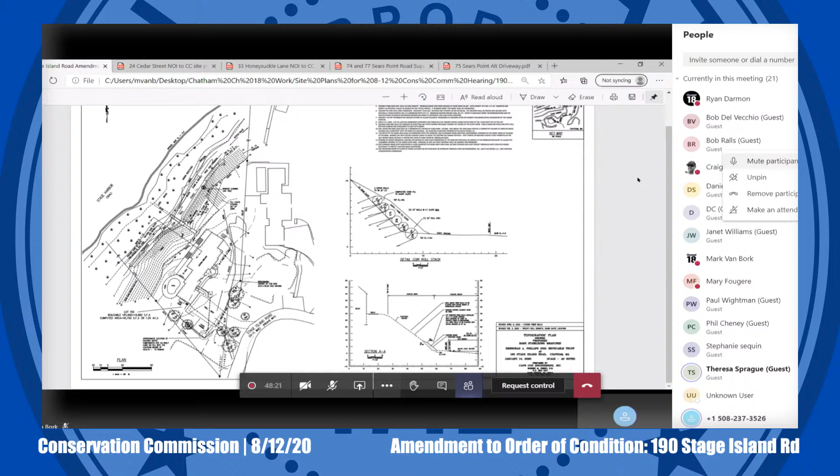I'll make it brief. We reviewed this with you back in the spring as the first step for the amendment process. I think the installation of the fiber roll that was the primary project went very well. Toward the end of that installation, there was an apparent observed need to extend those fiber rolls, and a 40-foot extension was proposed on the north end of the array that was installed. That ran into COVID-19 hearing trouble, and we ran into spring weather, which caused the project to cease. The amendment just sat there, and here we are today talking about it.

It's very basic, just a 40-foot extension of the project that was already installed. There's a few things about it that are different, where we're going to taper the cross-section, but the work would be carried out very much the same, except that it's far smaller in scale than the original project. The vegetation management would be identical to the management that's ongoing today. I don't believe there's much vegetation that would be installed there because the upper bank hasn't collapsed fully. That's all I could say, we're planning on getting something done as soon as the weather permits, and it would be a far smaller effort than what you've seen in the past.

So with that, I'd be happy to take your questions. Thank you, Bob. Oh, Janet, just Theresa Sprague is also on. Good morning, Teresa. Morning. I'm happy to answer any questions about the original installation of the fiber roll array, the plantings, et cetera.

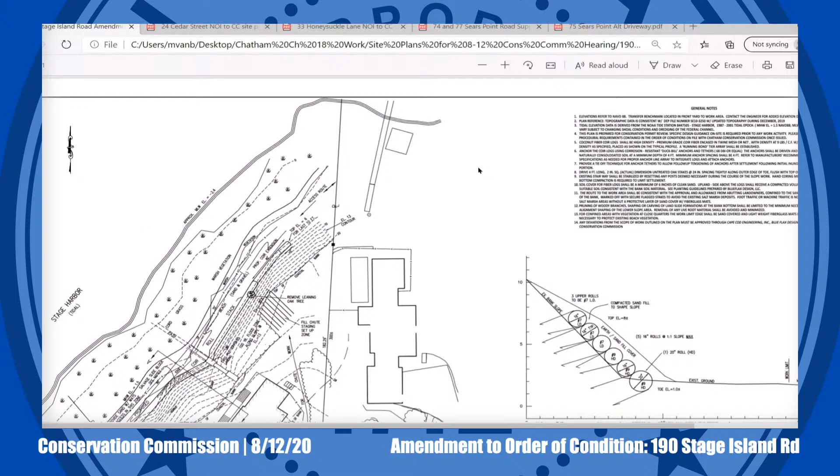I would just, looking at the notes for the revised planting plan, it doesn't mention any removal, it mentions pruning if needed. I just want to confirm that nothing is slated to be removed while extending the array. That's correct.

The extent of any, yeah, I know, hi Teresa. The extent of any removal is whatever slides or collapsed roots are in the way of the installation. But it's very minimal from my understanding.

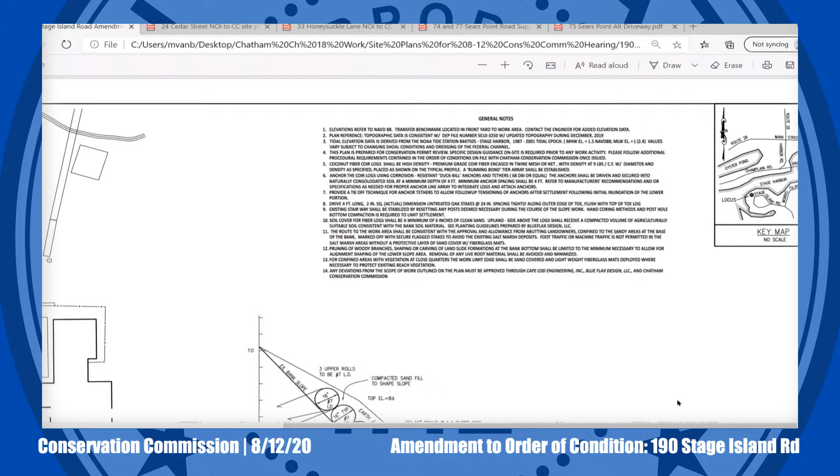Teresa? Yes, that's correct. And actually, you can see the area where we had proposed to move the array down into, or extend the array down into - I'm pulling up photos now, sorry you're not able to see them, from when we finished the project last spring. There's just a small extension of an area. There was no vegetation in that area. There had been some scour, and given the extent of the project, we just wanted to make sure we covered that additional scour area, so we're not causing more scour in the future.

So there was some scour there previously, not as severe as what we had seen, and as Bob pointed out, there was no slumping in that area. So we just want to be proactive. Okay, one more question, the amendment talks about next season. By next season, what do we mean by next season?

Well, when we originally made the request to amend, it was just as we were finishing up the project, and at the time everything was shut down due to the COVID-19 pandemic issue. So next season would be this fall, which I'm presuming is the same time period.

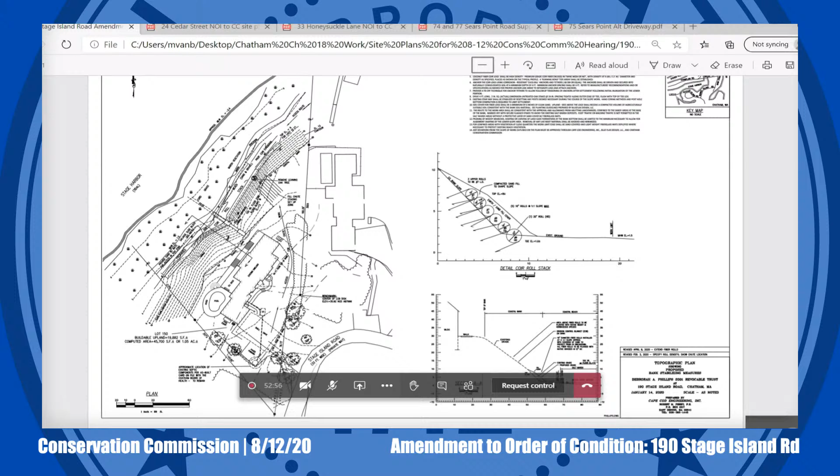So we had filed this, I believe, Bob, was this filed in April? Was this request to amend filed last April? Yes. Okay, so we meant the next work season, so after the summer season's over, late fall. Okay, that's fine.

Is that it, Bob? Yep, that's it. Okay, Tom, you had a question? Yeah, I was wondering if there are any problems with the stability of the pool or the patio.

Well, we're not near the pool. We've finished that area. That's just being managed with vegetation now. I was very impressed with the way this job was done, and they're pretty much finished with that end.

Well, my question was a little more specific, which was, is there any evidence of any lack of stability with the pool or the patio? I have not seen this site in several months, and I don't believe there is, because we concluded the concern for that pool was more hyperbolic than it truly was, but I haven't seen it lately.

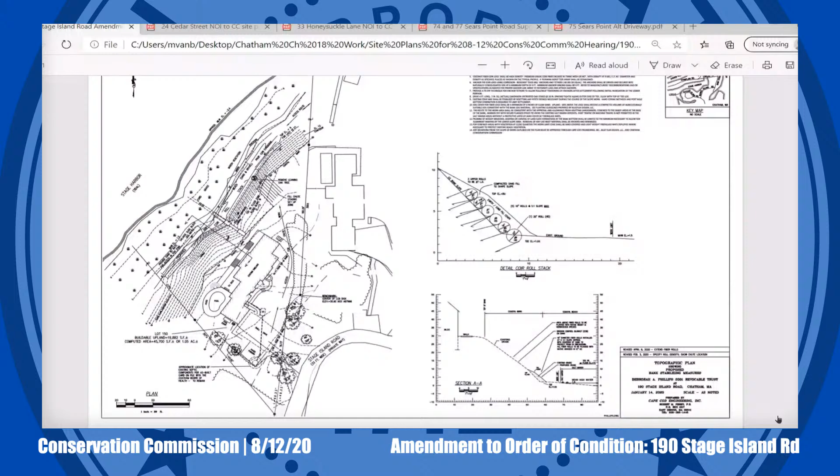Bob Ralls, motion to continue to the work session on September 2nd. Thank you. Is there a second? Clark seconds. Okay, roll call vote to continue this to September 2nd. Commissioner Ralls, aye. Del Vecchio, aye. Clark, aye. I vote aye as well. Unanimous. We'll see you all on September 2nd to review the order of conditions, the amended order.

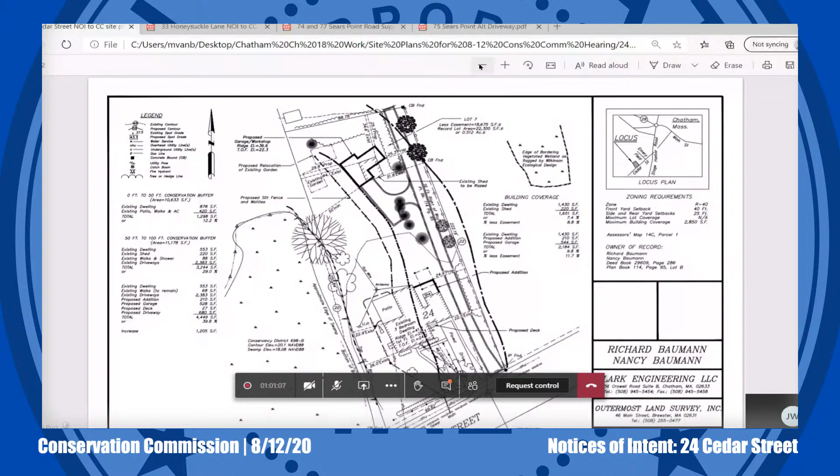Okay, Paul, what's next? Madam Chairwoman, next are the notice of intent, 24 Cedar Street, Richard and Nancy Baumann, SE 10. Mary, do we have a DEP file number on this yet? I did not see one, but I'll check again. Okay, I'll just continue with the announcement. The project is proposed construction of an addition to a single-family home, a detached garage and driveway at 24 Cedar Street, Assessors Map 14C, Parcel 1.

Okay, do we have representatives on the call today, please? Yeah, David Clark here. Good morning, David. Good morning. As Paul stated, we're looking to build an addition to an existing single-family home and a detached garage, all within the buffer zone to a bordering vegetated wetland.

The vegetated wetland is an old cranberry bog that has a discharge culvert that goes out to Oyster Pond on the neighboring property. This project started out as strictly an addition or expanded living space to the dwelling. We looked at several scenarios of how to get the homeowner some more living space. Unfortunately, most of the additions that were proposed were all within the no disturb zone. So we looked a little harder to try to avoid any disturbance in the no disturb zone.

So what we're doing is converting the garage into living space and putting a small addition on the north side. Because we're losing the garage space, we're requesting to build a detached garage at the north end of the property. The reason why it's so far away from the house is, again, we're trying to avoid the no disturb zone and also meet the zoning setbacks. Most of the construction is all within a lawn area. 4 pitch pines are proposed to be removed for the driveway to get into the detached garage.

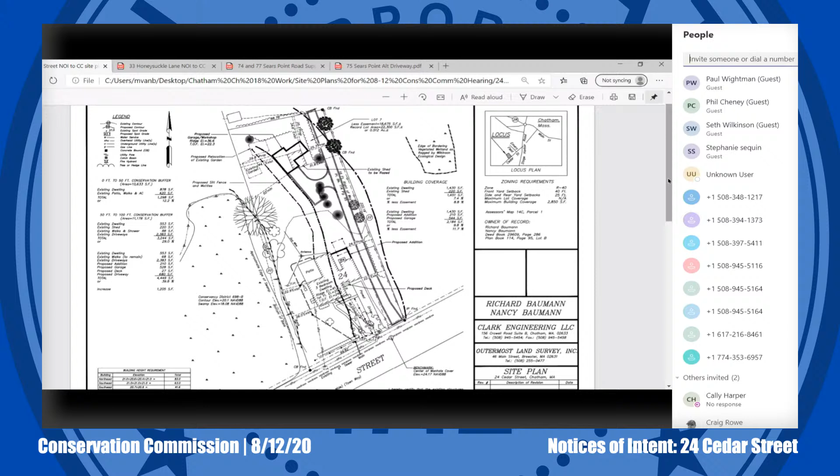Sorry about that. Yes, I've worked up a mitigation plan, which I believe you have. Yep, in front of you. I'm just losing it. I don't see it on the screen yet. We have the site plan. But we have received the mitigation plan. There we go. Thank you.

Ah, perfect. Yes, I've worked as much to get a healthy planting area. I've got a total of, checking my numbers here, 1,486 square feet of planting along the edge of the resource area as best we can. We're fairly tight to the house towards the street, but we're still managing to get a strip there where it's a fairly high erodible bank. So we're able to get 617 square feet of planting along that area to fill a gap. In between the two green mitigation areas you see is a really mature spruce tree, which is doing fine and pretty much prevents any new planting underneath it.

So we have to the north a broader area of planting, which would also displace an existing vegetable garden, which would be underneath that green area now and is being relocated a little bit to the north and east, as far as we can get it outside of the disturbed zone, but still have light to be a functional vegetable garden. I've got replacement trees: one white pine and three red swamp maples scheduled to go on the property to replace the pitch pines that are being removed for the sake of the driveway. And I think that covers it in general.

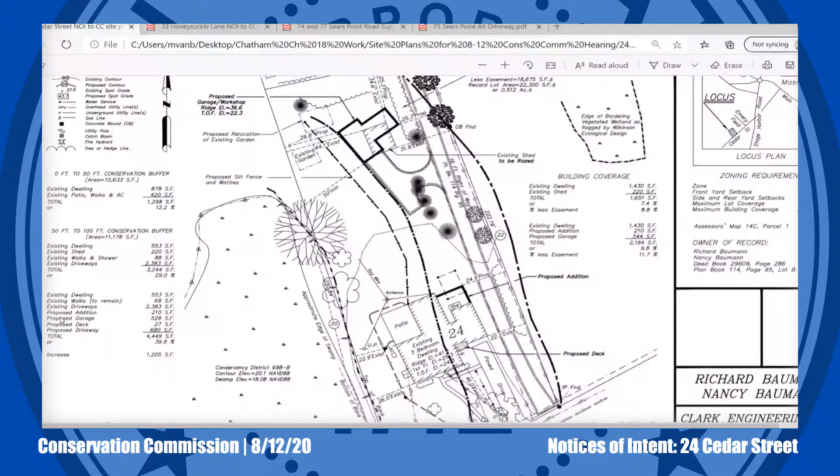Okay, I have to admit that with my poor eyesight, I'm not really focusing on the garage. Is that the one that looks like a square on top of a rectangle at the upper end? Yep. So the heavy line is the footprint of the new garage workshop, and the lighter hatched line underneath is the shed that's going to be removed.

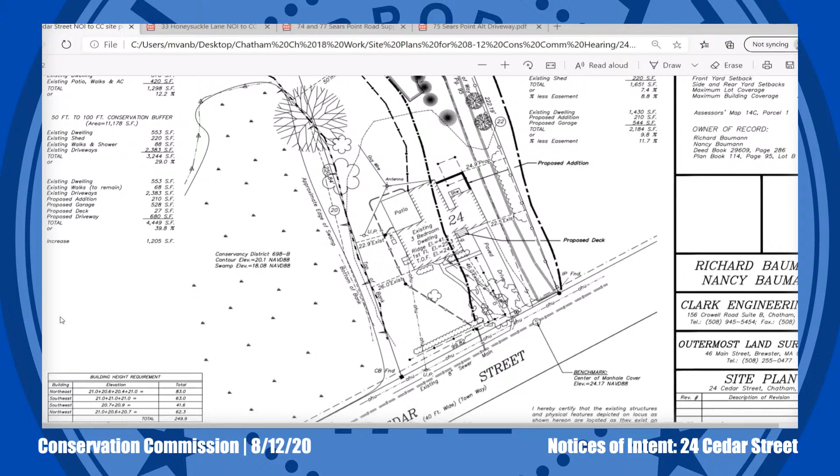Okay, thank you. I had some concerns about a couple of things. You touched upon it, which is—I think you recognize that the table submitted on page 7 of 8 of the materials, the note there that you're going to add 878 square feet of structure within the no disturb zone, that was an oops?

I don't see what you're referring to. Hold on a second, I'm looking. It's the letter from you to the Conservation Commission dated April 28th, 2020. On page 7 there's a table of the number of square feet being added and subtracted. At the very top of it, you'll notice within the 50-foot no disturb zone, for the section labeled area of structures under proposed square feet, is the number 878.

Oh, that is a mistake. Let's see. That 878 should be over to the left, under existing. Actually, it should be added to the left under existing. So what's being proposed is still 878. So the net change is 0. The bottom line is that the net change is 0.

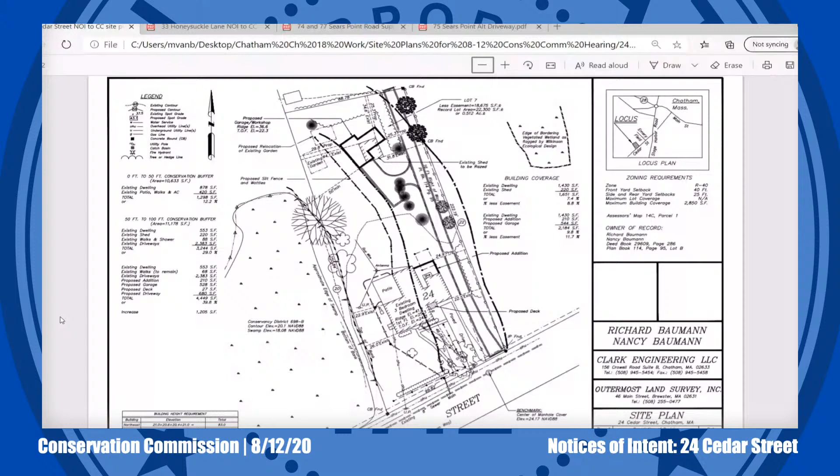The mitigation area to the north on the other side of the spruce, there's a lot of bittersweet wanting to grow out of the ground. Wondering what you're going to do about that before you plant. I apologize, I haven't looked at that spot in about 6 months. It was winter. I don't think there's too much in that exact area where that's going, perhaps a little bit on the very northerly end. But certainly doing a cut and wipe on any bittersweet we find in that area, and any other invasives, would be a prerequisite for getting these plantings in.

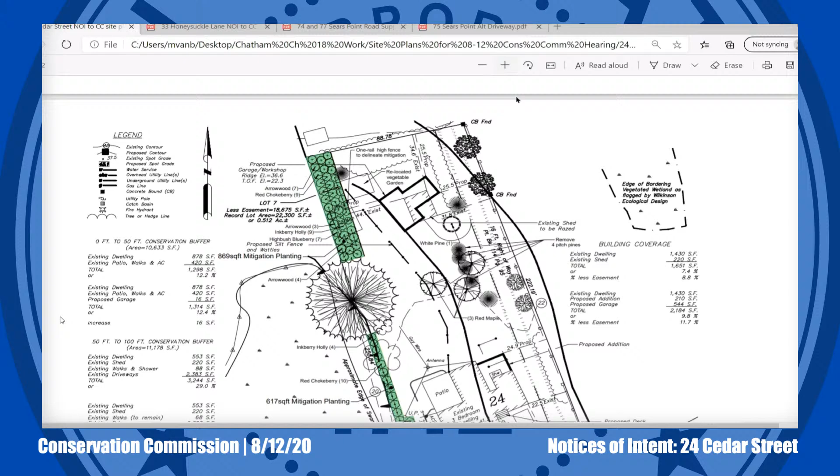Okay, and so we can add that to the OOC going forward. Yes. Another thing was the mitigation area to the south of the spruce. There are some existing arborvitaes and other plants, the mimosa tree and so forth. Those are going to remain? I believe all of that is going to remain. There's one just south of the spruce, I think a Rose of Sharon, an exotic ornamental, which may need to go. But it's, if I remember, a tired ornamental without much value.

Okay, and then you have a red maple being substituted for the ornamental plant on the south of the front yard. Yeah, I apologize, apparently the plan on the screen is a slightly different version than you might have received in paper form, because I think that was the final revision. Yes, it's an exotic shrub in the front there, and the owners thought putting one of the trees there as a replacement would be a good idea.

Do you think it may be too close to the house if you plant a red maple there? Oh, not at all. No, plenty of room for that, we've got good space there. Okay. I think that's all I had. Okay, thank you, very good. All right, thank you, Bob. Any other questions or comments from anybody on the call?

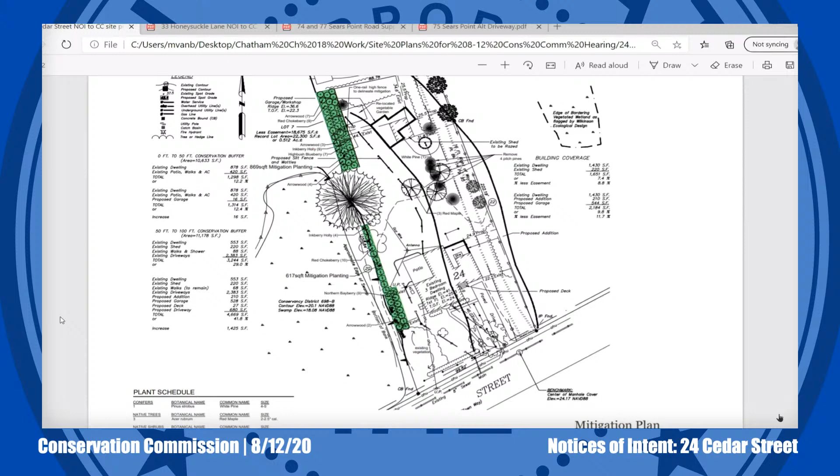Okay then, David, are you and Phil available next Wednesday if we continue this to get these pieces put together and complete it? Yes, I am. I can get you the revisions on the plan and the variance by the end of the week. It won't be your typical one week request to have it before the meeting, but if the commission is fine with that, I can. We're fine with that, since we're the ones who scheduled the hearing within a week of the scheduling.

So yep, that's fine. So just to review, you're going to correct and conform all the figures on the site plan and the mitigation plan, identify the 50 and 100 foot boundary lines, add a work limit line as close to the NDZ line as possible, add a request for a variance, and ensure the mitigation plan the commission has is the most recent and correct version. That's what I've got.

Yes, Phil Cheney here. Once I have the revised site plan from David, I can revise my plan, resubmit the PDF, and I assume you'd want a couple of hard copies as well? Yes, please. Mary, how many hard copies are we collecting these days? We just need 2 for the file, because everybody else will receive it electronically. Is that okay with all commissioners to receive a digital copy only, or does anybody want a hard copy?

I'd like a hard copy, please. Okay, then make 4 in case somebody else wants one. Very good, I'll provide 4 hard copies. Thank you. And Janet, just that the Rose of Sharon has to be identified to be removed too on the mitigation plan. Okay. Did you get that, Phil? I'll take a look and confirm that. Okay, thank you.

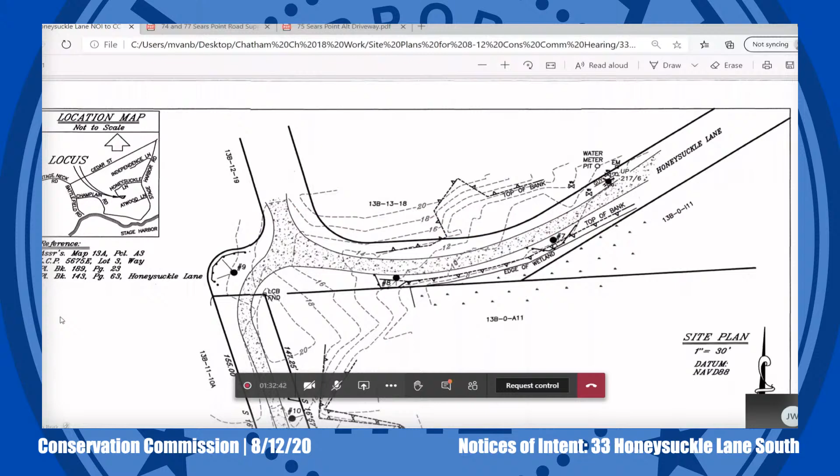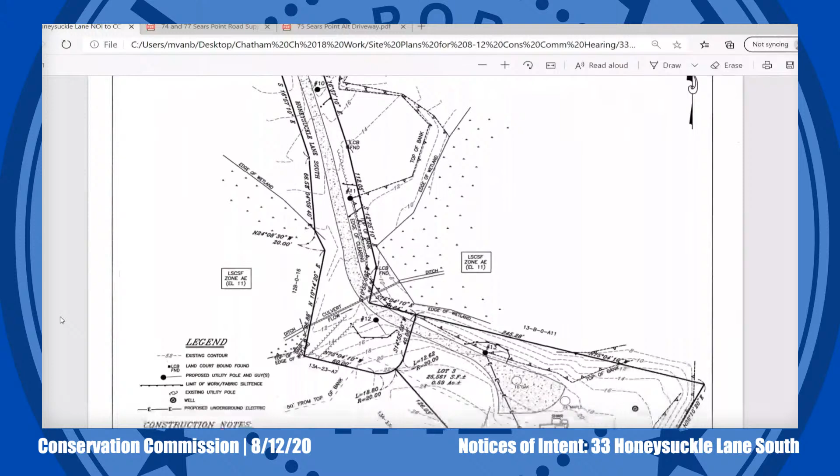Good morning, Stephanie Sequin with Ryder and Wilcox, representing Dan and Roz Smythe; Mr. Smythe is here attending as well. The project is the installation of 7 utility poles and overhead electric service to provide electric service to the existing house at 33 Honeysuckle Lane South, at the very end of the lane. The house was built in the 50s.

Currently, the electric service comes from Champlain Road, overhead across private property to a pole also on private property, then I believe underground to the back of the house. I said in my narrative it recently came to the attention of the Smythes, but it was actually more like 5 or 10 years ago that this has been going on. The current service was installed without a legal easement for any of the poles or wires that exist.

The Smythes have been in lengthy discussion with the private property owners and have repeatedly been informed there is no legal easement. The current owners are not willing to grant one, so they've had to investigate an alternate source of providing electric service. They've also been in extensive discussions with Eversource, who exhausted all other options and determined the only viable option is to extend the existing overhead wires that come partway from Champlain Road or Stage Harbor Road along Honeysuckle Lane, the rest of the way down Honeysuckle Lane and Honeysuckle Lane South to the north side of the existing building.

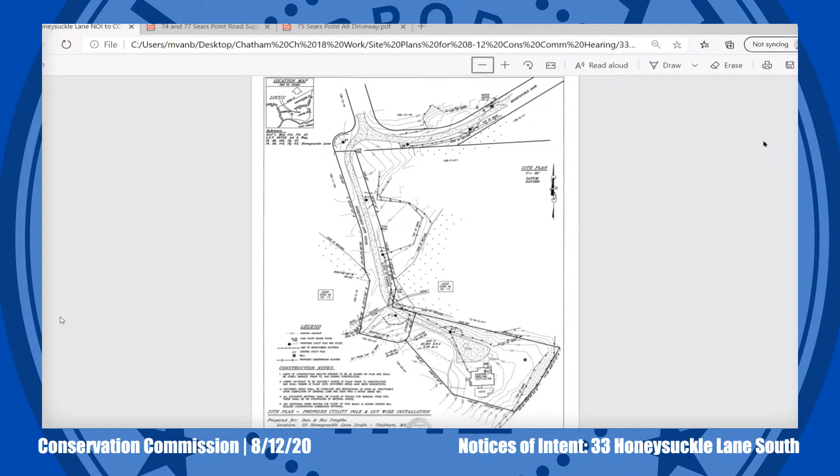I would recommend that we continue this to the work session on September 2nd for review of an order of conditions. Do we have a motion? Bob Ralls moves to continue to the September 2nd work session for order of conditions. Do we have a second? Clark seconds. Thank you. Roll call vote to continue to the work session on September the 2nd.

Commissioner Ralls, aye. Del Vecchio, aye. Clark, aye. I vote aye. So this is continued to the work session on September the 2nd. Thank you very much. Thank you all. Thank you.

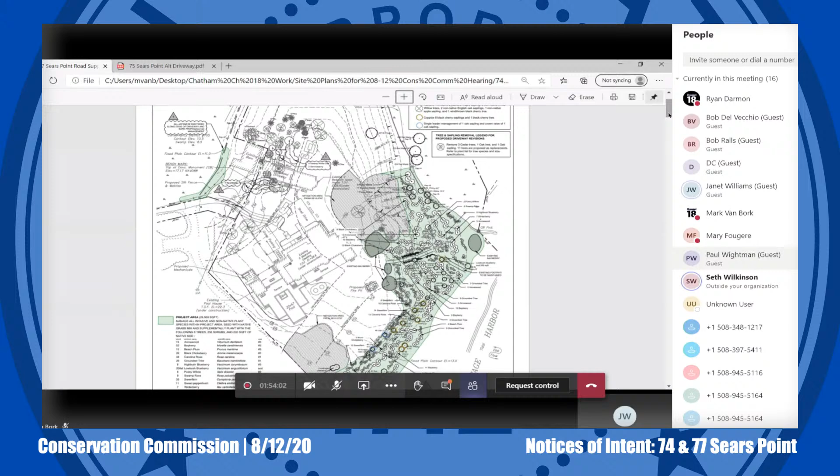I think I can mostly summarize, and I'll go into a bit more detail with regard to activities around the proposed driveway and the guest house, since that was a little less developed in the field, but there really haven't been any considerable changes since we reviewed the data for the extensive restoration here. It continues to be just shy of 30,000 square feet of additional vegetation that would link to the already previously proposed mitigation area, which is well underway. That was approved under a separate order.

To run quickly through what's proposed on the embankment, in addition to the complete removal of invasive species and restoration planting, which is over 250 shrubs, 200 square feet of low bush blueberry, 910 grasses planted as plugs, 382 forbs planted as plugs, as well as seed mix and 6 trees, which would be pussy willow to replace the exotic willows down in that wetland area.

The quick list of what we're proposing to manage in terms of trees: there would be 1 small tree and 8 saplings of black cherry, which we would propose to coppice. We think they'll have a much longer and healthier life on this windy coastal bank if turned into multi-stemmed trees. There are examples of those thriving at this site already, and they'll be less prone to wind throw in particular. We've also had success with this technique just down the road at a nearly 10-year-old project on Battlefield.

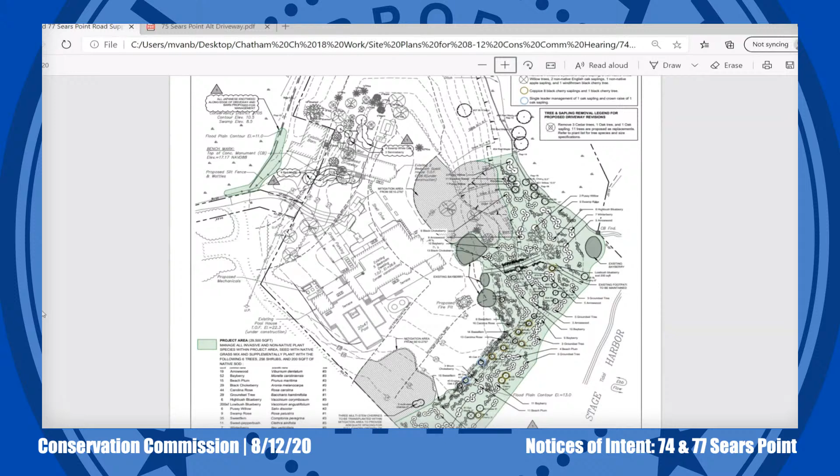And Mark, if you can zoom in a little bit on where it says proposed driveway - we don't need the mitigation area anymore. Keep going, you can do it one more, and maybe one more.

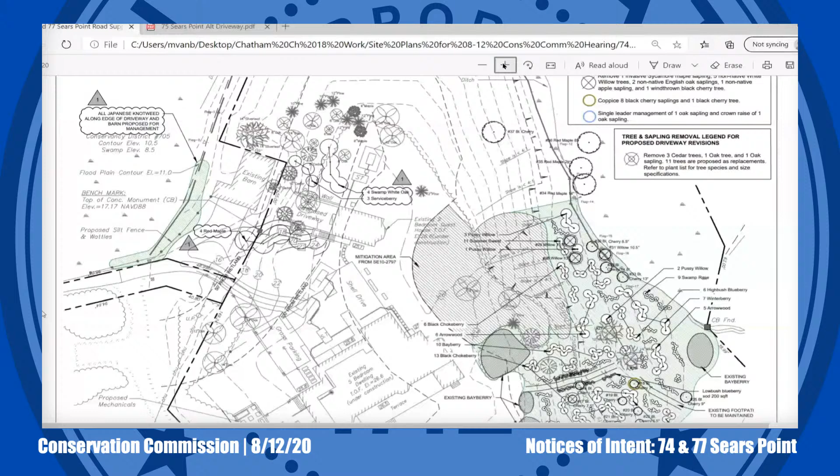So just to confirm again, the retaining wall is marked on the north side of the proposed driveway. Is there also going to be a retaining wall on the other side? A very short one, I'd say a little less than half the length of the other one, and that's just to facilitate getting a set of stairs from the upper level down to the lower level. But the rest of it will be regraded.

So, oh okay, I see there - I see the stairs. Okay.

All right, other questions? Oh, David, there were no changes since the last review on this part of the plan. So do you have anything further, or should I just open it to questions? No, I don't have anything further.

Okay, questions and comments from commissioners? Clark. Yes, Tom, go ahead.

Yeah, for David. Between all the various plans, when I was adding them up last night and looking at them, I came up with 4 different configurations for the driveway. And then confusion reigned, of course, because we got a drawing last night with 2 options noted on it.

In all honesty, I have no idea what driveway configuration you're going with, because of all the plans that have been tossed our way. Have you settled on one? Yes, we have. It's the only official site plan submitted for the filing, from Clark Engineering.

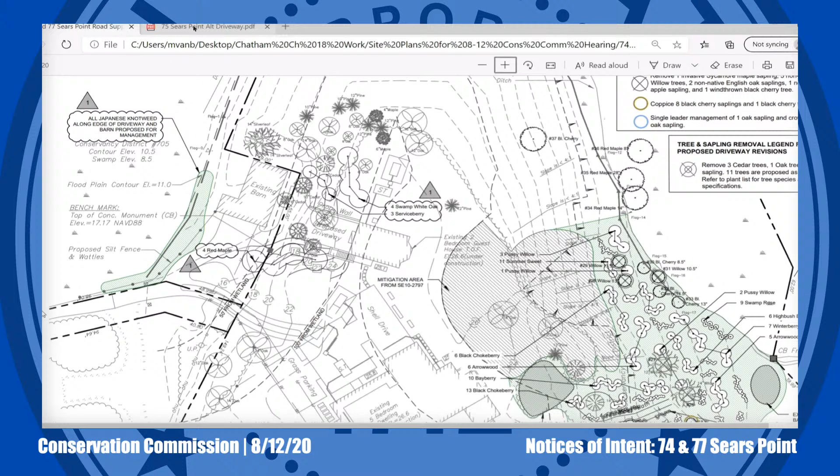Hold on a second, David, I'm going to interrupt you. Mark, can you click to the next tab there? That's the one he's talking about. Okay, thank you, go ahead David.

So alternative 2 is not a proposed driveway. It's not what we're considering, but it's an alternative showing how we could provide access to the lower area and stay out of the no-disturb zone. I said in the narrative it was 300 or 400 extra square feet of site coverage within the 50 to 100 in order to achieve that, and it's not a proposal we want to pursue.

Okay, I had one other question. When we were out on the excursion around the property, showing things to us, I noticed as we got back to the barn area there was discussion about a hillock that would have to be graded. I didn't see anything in the plans or diagrams giving any idea what that grading would look like, how much soil would be disturbed. Since that's occurring at least in part in the no-disturb zone, I think that's important information we would need to evaluate the site proposal.

So the official Commissioner site plan from Clark does show proposed grades on both sides of the driveway going into the garage. The solid lines with the 16, 18, 20, and 22 boxes are proposed grades. Underneath are dashed lines showing existing grades. So we're showing how that slope is cut back on the south side of the driveway, and we're minimizing the regrading on the north side by adding a retaining wall. Because a retaining wall is used, it really minimizes the amount of regrading necessary. It's basically just a cut, and then the wall takes care of most of the regrading, keeping it within the 50 to 100, which is beneficial with that design. But it is shown on our plan, there's a lot going on there so it's a little hard to see, but it's those solid lines.

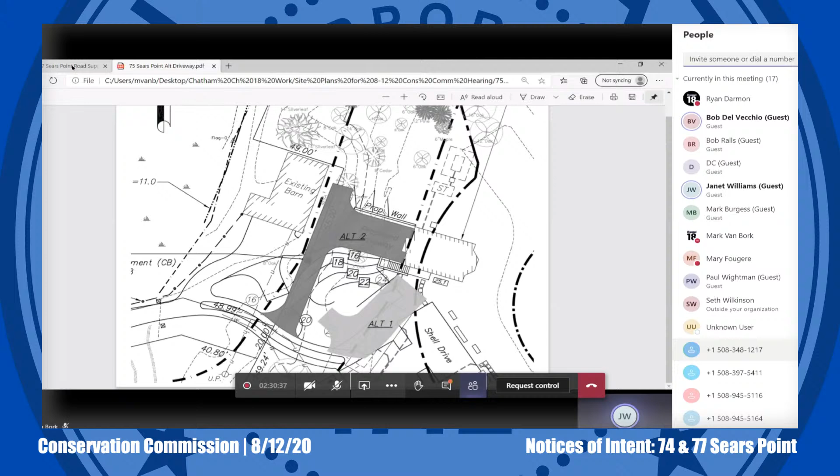I would say, I don't know. I'd have to think about it, Janet. I accept, I totally get that.

David, does alternative 2 require regrading along that area where it drops from 22 down to 18? Yeah, I haven't looked at the grading yet, but obviously we got to get from a higher elevation down to the proposed garage level. So you have a grading engineer. Yep, we might need a retaining wall on the right side of the driveway to limit the amount of regrading.

All right, for my 2 cents, as I'm sitting here today, I am generally loath to depart from the standards, and staying out of the no disturb zone is a real principle that we adhere to. But given the bigger picture of what's happening here, at the end of my analysis, I think about the impact to the resource area and how the protected interests are best served. I would fall on the side of granting the variance and minimizing the impact to the 88 square feet of already highly disturbed, no disturb zone, on the landward side of the existing barn.

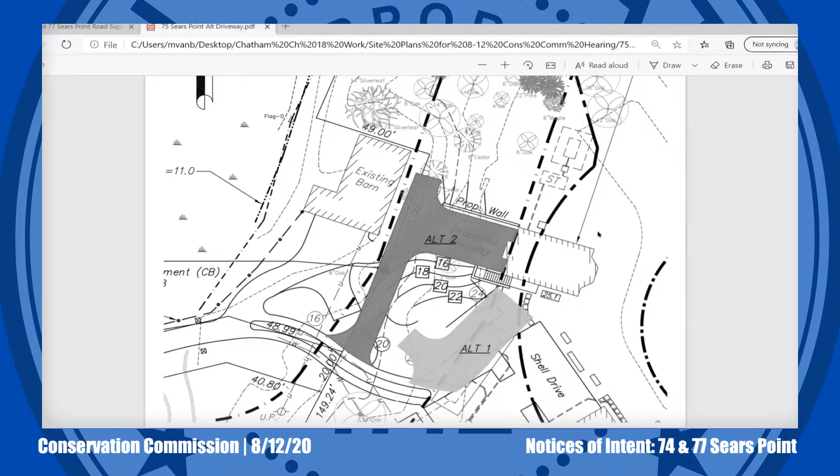So with that, I would ask for a motion to continue this to next week, when we will be making a final decision about which way to proceed. Do I have a motion? Yes, Bob Ralls, move that we continue to August 19th for further deliberation on the proposal. Is there a second? Clark seconds.

All right, roll call vote to continue to August 19th. Commissioner Ralls, aye. Del Vecchio, aye. Clark, aye. I vote aye as well. It's continued to next week for deliberation and decision. Thank you all very much. I appreciate it. All right, thank you, guys. Thank you.